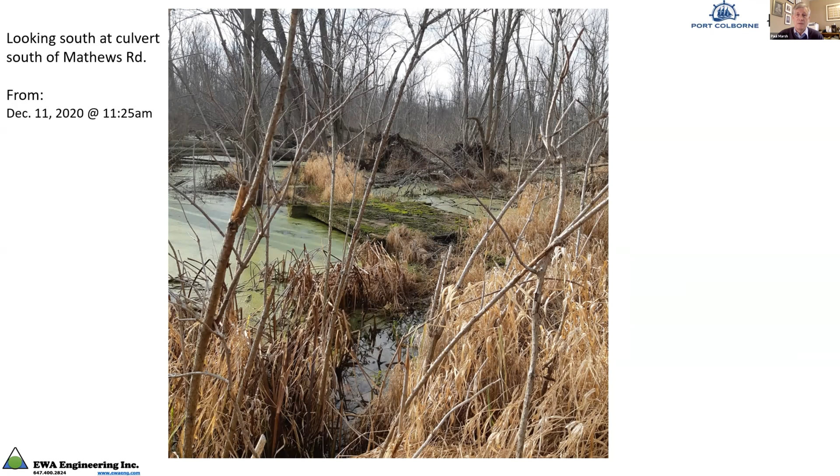My goal is to— oh, we lost the presentation there. Alana, can you bring the presentation back up?

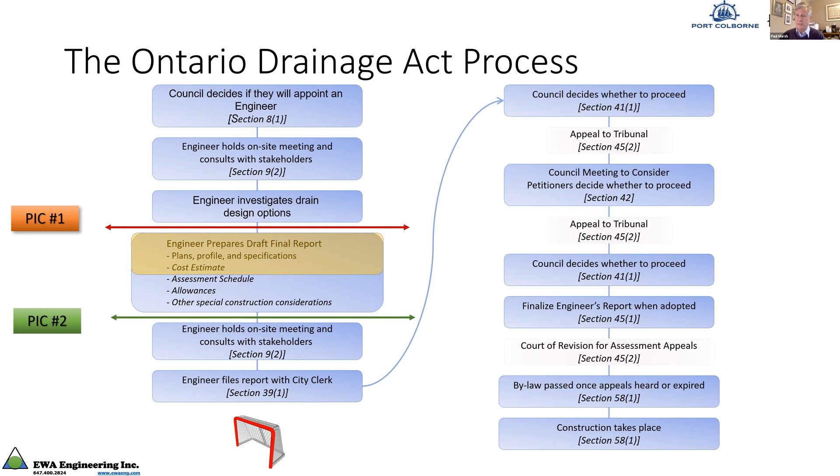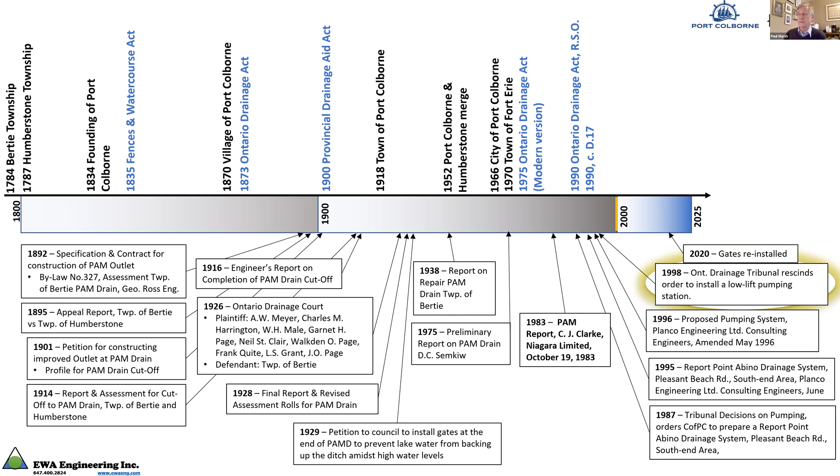In 1998, an Ontario Drainage Tribunal rescinded their original order requiring the installation of a low lift pumping station. There was an entire process, which I'll detail a bit more, in '96 and '95 to identify pumping stations, and there was a drainage tribunal over that. The cost of it was set aside and nothing was ever built.

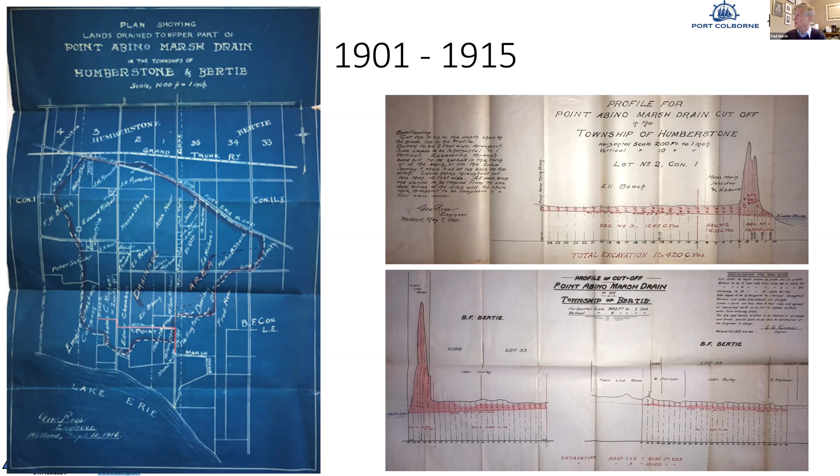These are some drawings from 1925, but to my knowledge this is not what was built. The channel doesn't follow this path.

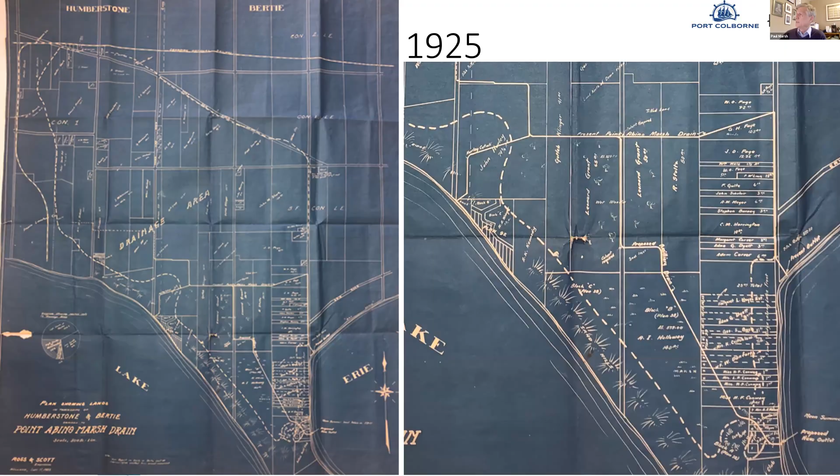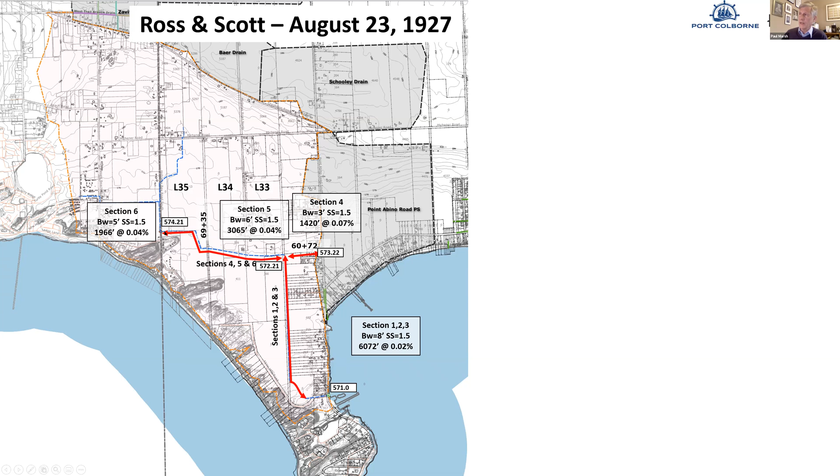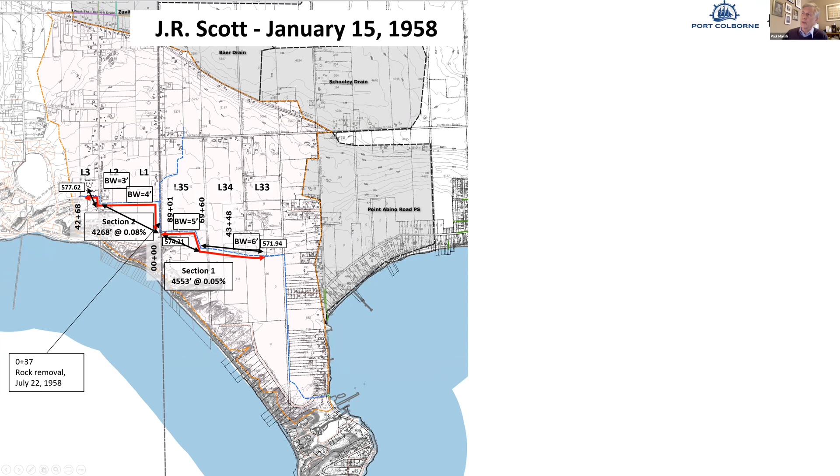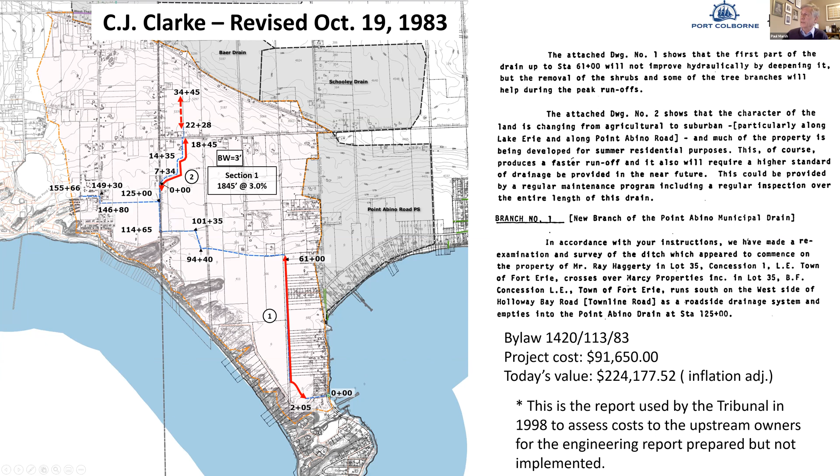This is in the CJ Clarke report in '83. There's a layout for a pump station, and I'll get a little bit more on that later in the report.

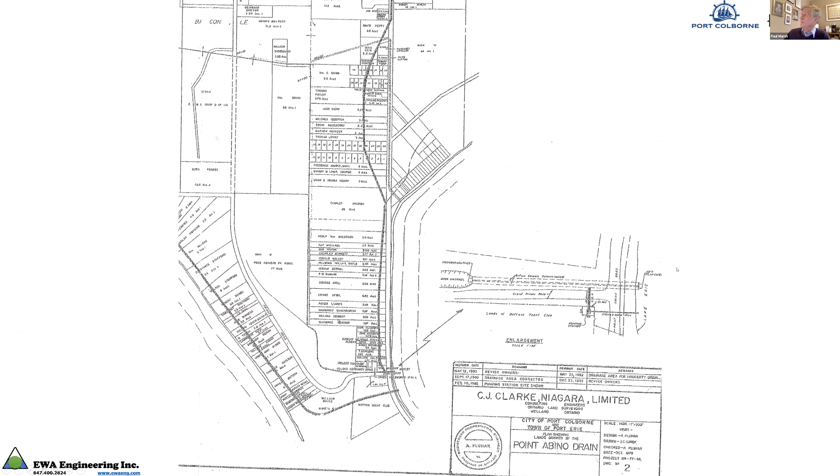This is the 1995 report that was prepared by Planco Engineers, and it was to locate a pump station for the west side, either on Pleasant Beach Road or Holloway Bay Road, in order to pump runoff off the drain out to the lake. The estimated cost of '95 was 155, which if we adjusted it to today's dollars, roughly $250,000, but it excluded property acquisition, legal, geotechnical, environmental requirements.

There was a tribunal over this, and it was basically that the original tribunal required that this report had to be prepared. The report was prepared, but nothing was ever constructed.

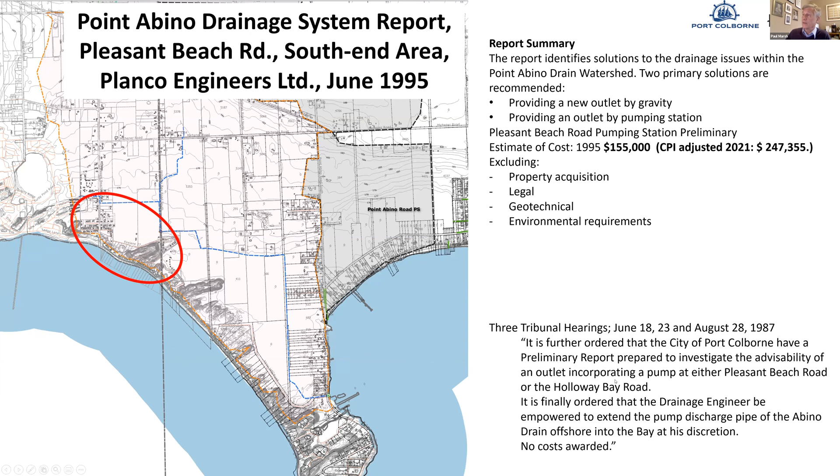This report, Planco Engineers 1996, same kind of thing, 190,000, which adjusted would be 300,000, with the following exclusions. The hearing in 1998 set aside the original order, rescinding the duty of Port Colborne to construct a pump station. This was brought about because people opposed the cost of constructing the pump station at that time. So there were plans to build a pump station, but the residents in the watershed at that time opposed it.

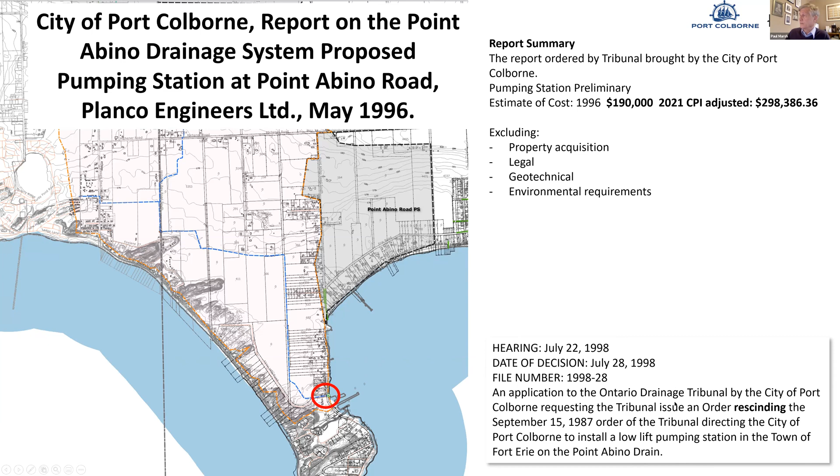Just a brief point on the eastern boundary of the drain. We made some potential revisions of the boundary based on the 1983 Clarke report, shown here with some of the historical layout of the town, where the original town line road was, and where the split between the Fort Erie part and Port Colborne part occurred.

We used the terminology going forward of Point Abino Drain. The historical terminology was the Point Abino Marsh Drain. The East Branch, shown in 1927, has no other record that we were able to find about it. As far as we can tell, it still exists as a drain—it was never abandoned, so we believe it's still part of the drain.

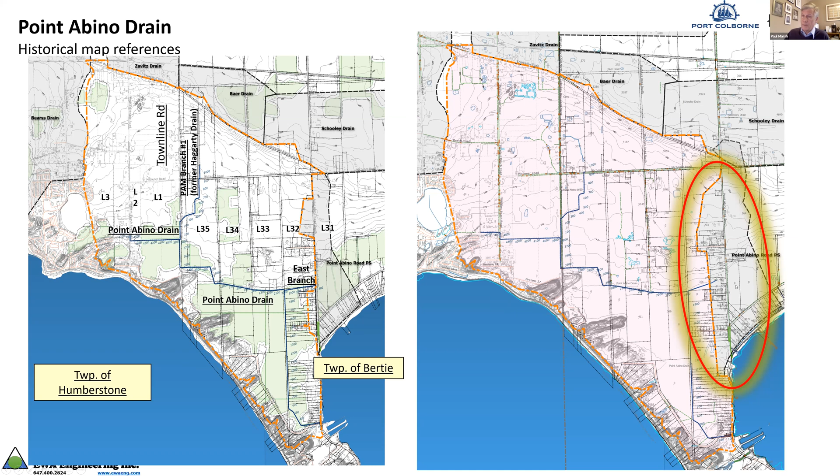The town of Fort Erie is conducting a study of the Point Abino Road pump station, located down here in the green lines. That study has provided us with a revised boundary, shown on the plans, for the lands that would drain toward the pump station versus the lands that would otherwise drain to the west into the Point Abino drain. So I want to make a distinction that anybody affected by the pump station won't be affected by the drain, and vice versa.

So I'm just going to give an overview of the baseline report. The intention of the baseline report is to state what we know about the drain and what its current issues, conditions, problems, or successes are.

This is the Point Abino drain in terms of its geography, geology, or geomorphology. There's really an entire low part of the drain, which historically we saw at 0.02% and 0.04% grade over to this point. So it's quite slow draining to the east and draining to the south and out again.

Along this western boundary are the sand dunes, which form the interface with Lake Erie. This is overlain on the Onondaga series of limestone. This upper portion is really the upper part of the watershed, and it's the part that actually has contour lines, suggesting there's fall from the upper part of the drain down to this point.

The blue line marks 176 as a contour or elevation, meaning the drain south of that is below 176 in elevation. I'd like to describe this with an analogy: this drain is kind of like a bathtub, where the lower part of the drain is the tub, and one wall of the tub, instead of being made out of steel, is made out of sand.

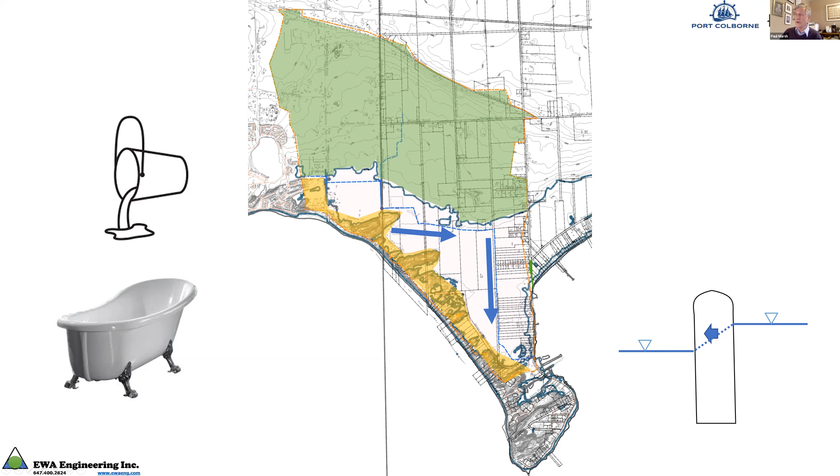As part of our study work, we've conducted a survey of the upper part of the drain. If you recall the original picture I showed, we have survey points from that, thanks to a Town of Fort Erie staff person, Troy, who waded out and picked up the inverts for that culvert. But to do a physical survey of the entire area at that time was not going to work out.

Above that, we have survey points, and these survey points allow us to prepare base plans that look like this, where this line represents the actual survey points that we found. This dashed dot line is the original design that was prepared in 1983.

It shows a 0.33% grade, on the branch one profile as an example. It's showing the left and right bank and the culverts that cross, and the blue line is standing water in the drain.

You can see there's quite a little drop here north of the Holloway Bay Road South culvert, then a bit of a high point close to the original drain grade, but it creates standing water because this acts as a hump, preventing it from getting over and out. This upper portion is fairly close to the original design grade, but actually a little bit steeper than the design indicates.

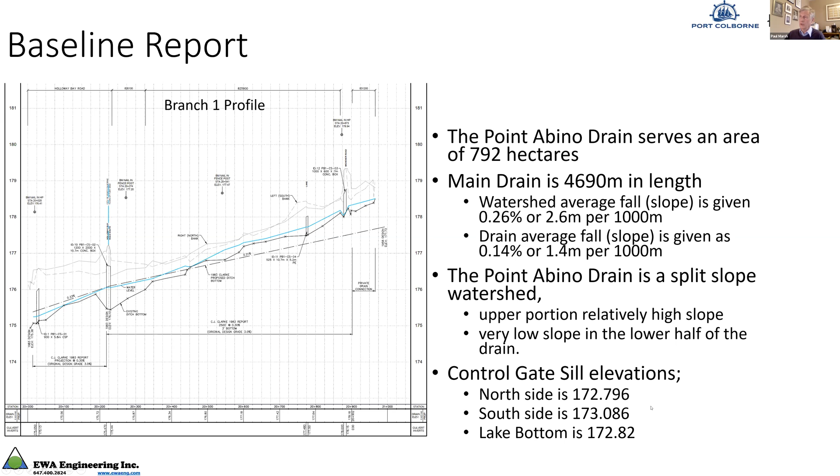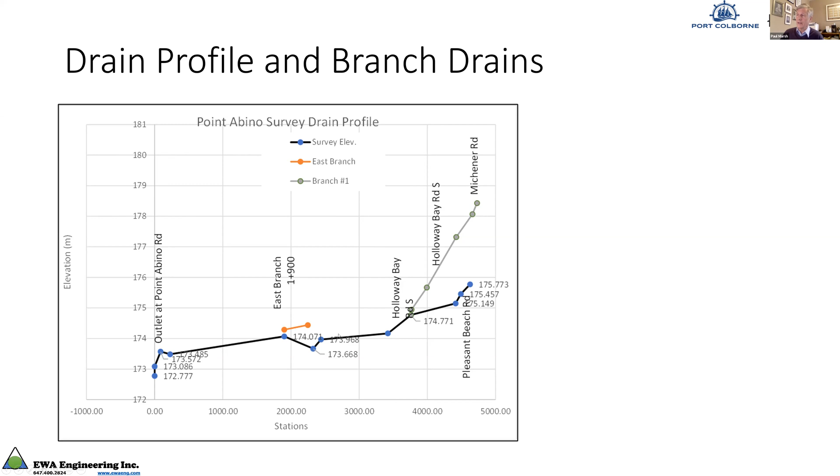What we'd prefer to see, all things being equal, is 1 meter of fall per 1,000 meters, which is 0.1%. Going over to where Holloway Bay Road is, at 3,500 meters we'd want to see about 3 meters of fall for a good drain, but there's just not a way to get that with the Point Abino drain. It's just the geology that's there. We're down at around 0.02 that entire way across.

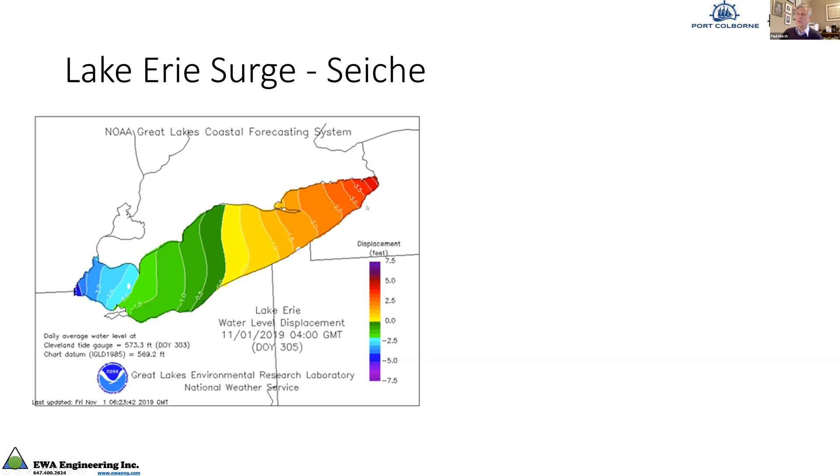The environment in which this drain exists - this is from the National Oceanic and Atmospheric Administration, showing the impact of a seiche condition where wind-driven waves cause surge. This is a high-low pressure difference from one end of Lake Erie to the other, showing around here a 3.5-foot increase, which is relatively small. We've seen this get quite a bit bigger, but it's a phenomena that happens across the west end and east end of Lake Erie. It's the reason we have flap gates on the outlet.

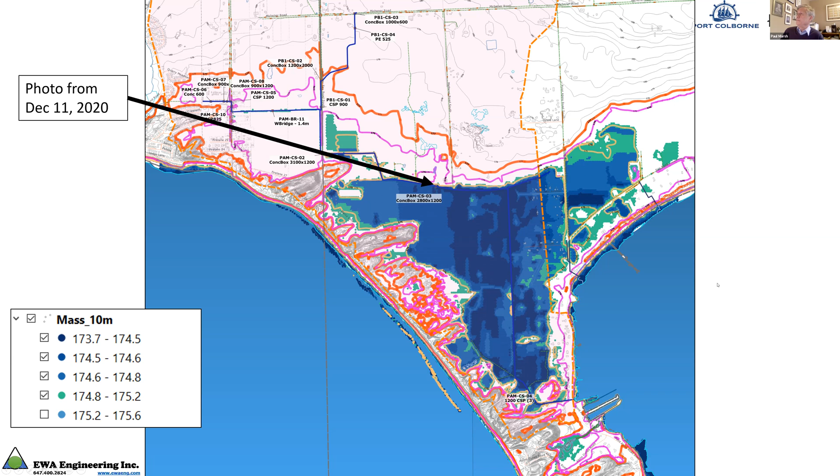You can see that this entire area would be significantly flooded by that high of a lake level. This is where that photo from the very beginning was taken, right up here. Here are our flood levels, and this is the outlet as it exists today, with the outlet down here, and these are all our survey points shown above, plus property lines for both Point Abino Road and Abino Hills Road.

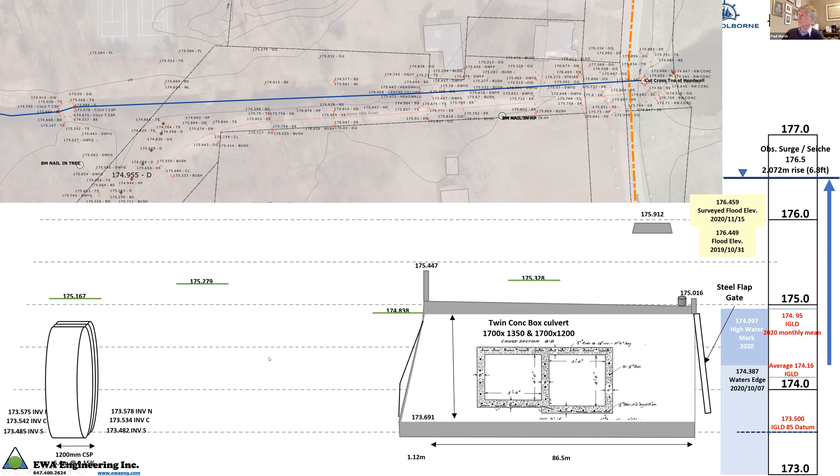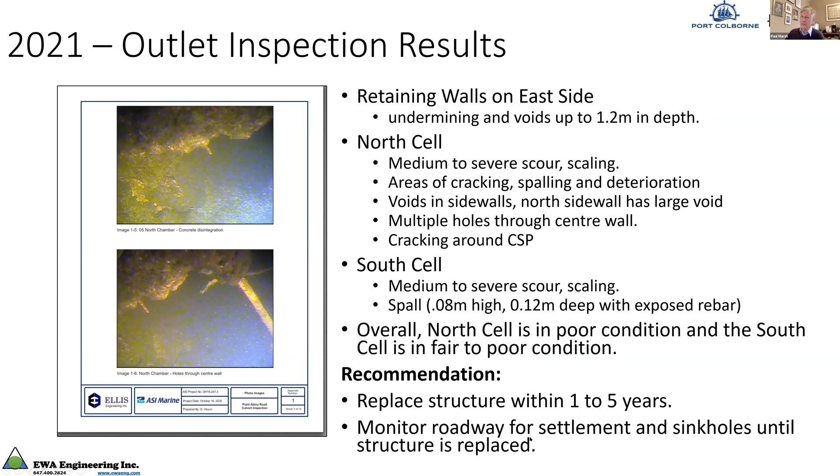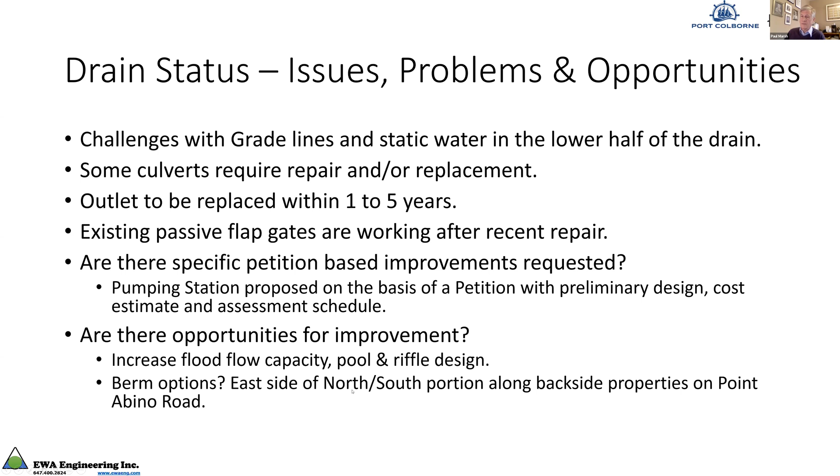I was in a meeting previously on the Point Abino Road public meeting where they talked about having some berm options along that north-south last part on the east side. But that would have to be done as part of this drain report if it's to proceed.

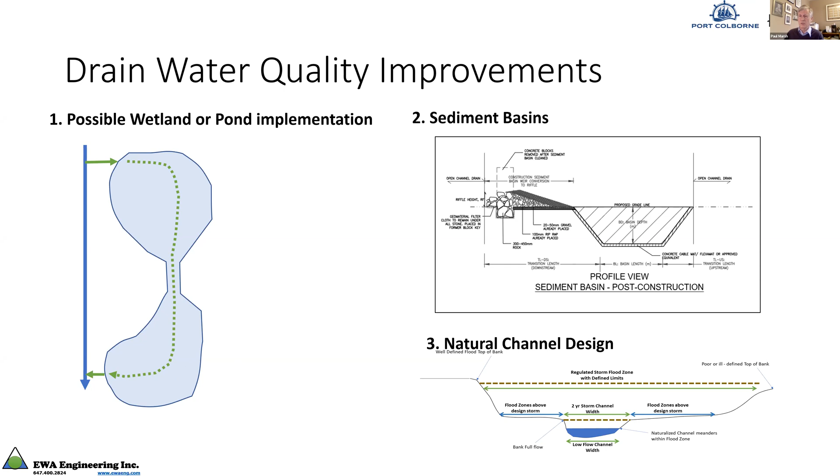The control structure has limited capacity. It's there really to control surge and control that. There are some opportunities to make that work a little bit better.

We could have flow level monitors and have active control on the gates - I'm not sure, that may or may not work better. There's no trash rack on the entrance, which oftentimes we would see to prevent material from coming in and getting plugged or stuck. And the steel flap gates have to have a certain velocity of water in order to push them open, so there's some resistance based on their weight to how much water can get out.

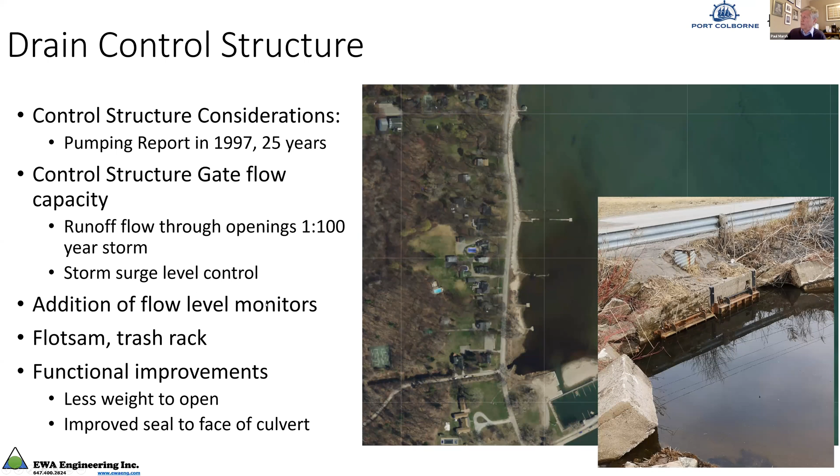Now, not all rain is converted 100% to runoff, but if we said there was a 2-inch rain, a 50 millimeter storm, and 25 millimeters of it ran off, it would take 4 days of pumping with a standard pump in order to move that much water off the watershed.

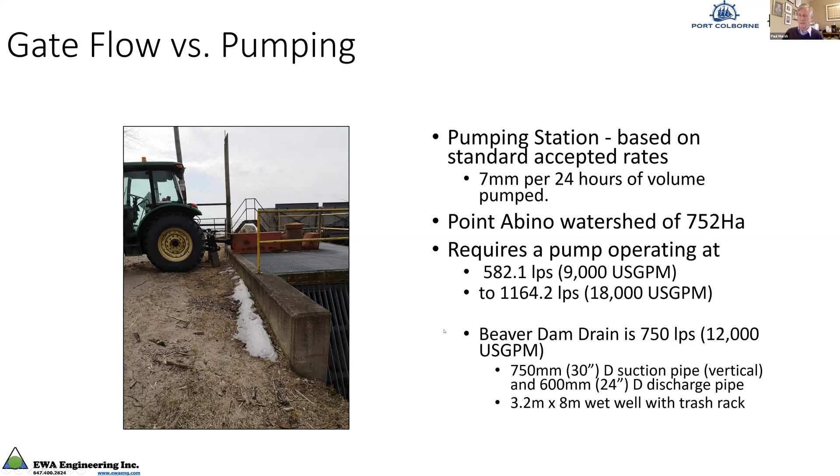This Point Abino watershed is 752 hectares. It requires a pump roughly between 600 and 1,000 liters per second, so it's just a bit under this pump. The original historical size is quite a bit smaller than that—about half that size.

This is talking about, so we've talked about the baseline, and we're talking now about our modeling of how the watershed functions and what our goals for the watershed are. We're basically testing the watershed if it meets accepted standards, and what we want to get to is a storm that is 68.9 millimeters in 24 hours.

The type of storm we use is called the Soil Conservation Service type of storm. Some storms are different intensities, and this is an accepted one for an agricultural watershed, the SCS type storm. So if we get this much water, we'd like to see the drain function to pass this much water in 24 hours. We have had more storms bigger than that.

We have had storms 63 millimeters in 1991 in 2 hours, and that would cause flooding even if we have a design that meets what we want. In '79, we had a 100-year storm, 105 millimeters in a 12-hour period. So we have had bigger storms.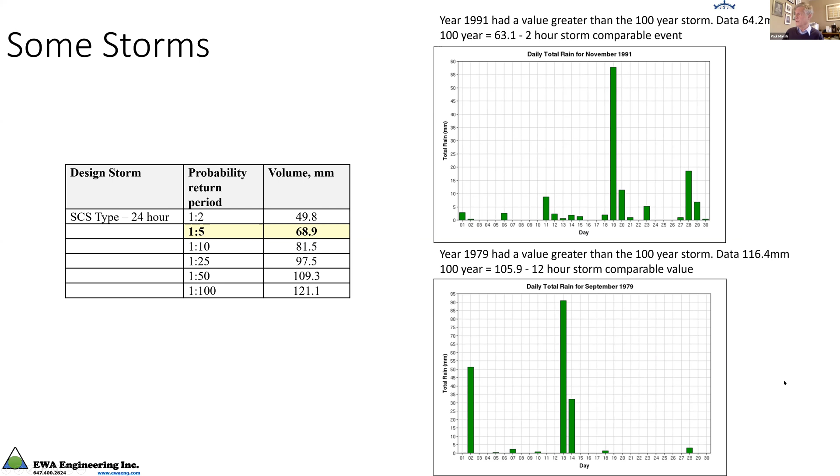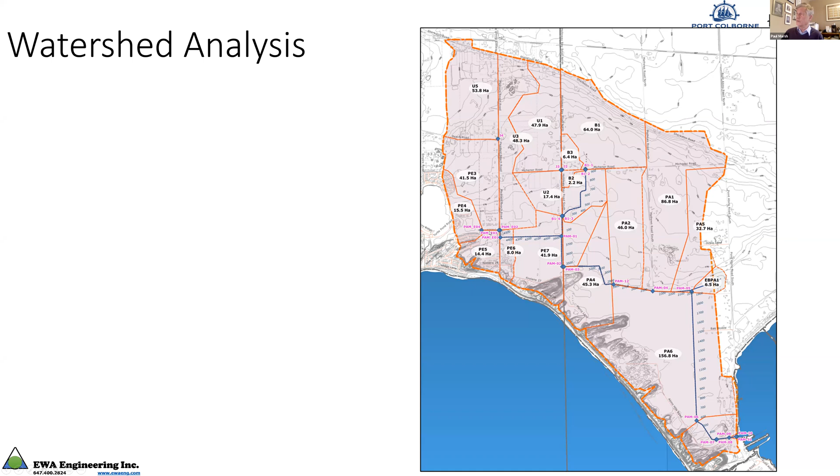This is what the watershed model looks like. We break it into these individual pieces, and we predict how much water will run off to a specific point—that's what these blue diamonds indicate. Then we figure out how much water moves from point to point all the way to the outlet. This is the kind of view that we get out of that.

You can see that half of the upper watershed—this is Holloway Bay Road right here—has quite good positive grade, and there's excess capacity for the drains to pass. Once we get to Holloway Bay Road, we have a lot of challenges in the outlet, and we have some challenges in our survey results.

So I find it hard to believe that there is this bump, but it's the data that we have this far that we have to try to clarify to understand how this drain is getting out here. But these points on average at 0.04 and 0.02 match the historical conditions.

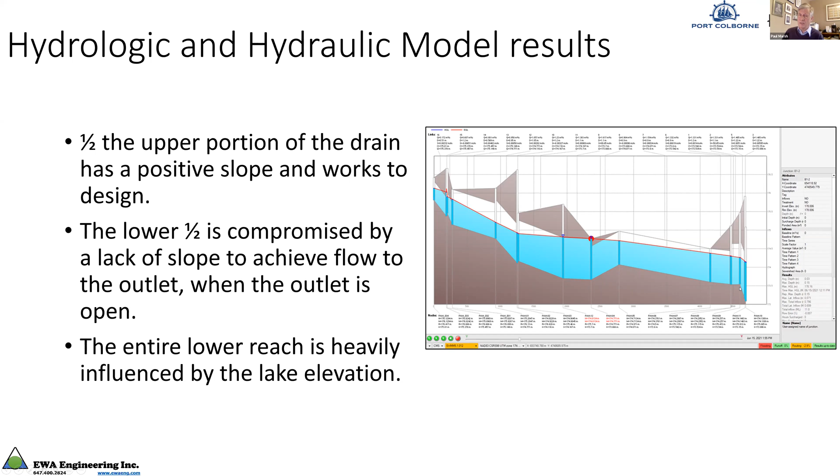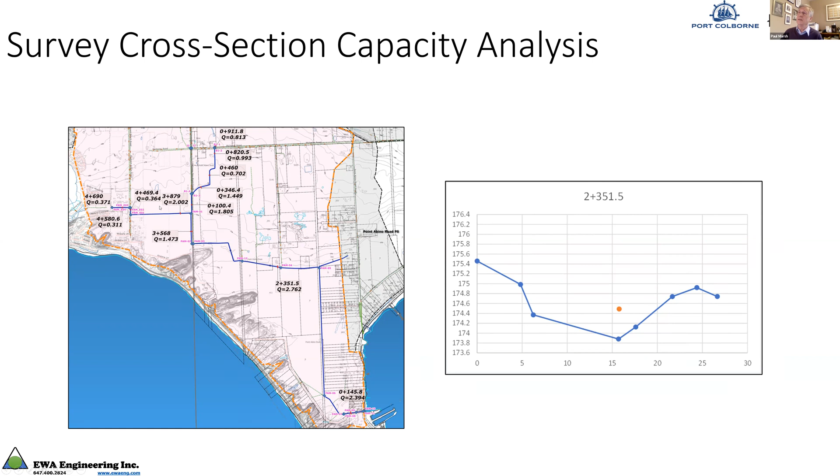Besides the computer model, the hydrology part, we look at the survey and we look at the individual sections, and we calculate how much hydraulically they can actually pass. The model really does an idealized trapezoidal channel of dimensions that we provide it, but we analyze these individual sections to calculate what their actual capacity is at that specific point. That's what this is showing here.

In addition to that, we analyze all the culverts, the same kind of thing, to see if they meet that 1 in 5 year objective. This is one of those culverts, this particular one here, and we call it marginal because it's in yellow. You can see this is the predicted upstream water surface, which is higher than the roadway, which is not desirable. For this to pass, it should be down around here.

However, this one is not a road culvert. If it's a road culvert like this culvert on Holloway Bay Road, it has to meet the 1 in 5 year standard because it's a local road. This is an entrance culvert to someone's private property, and the standards can be a little less, a 1 in 2 year instead of a 1 in 5 year. We don't like to see that because those culverts hold water back.

You can get an idea of how that is because the culvert immediately upstream is a concrete box culvert, 1.2 meters by 2 meters, and this one is a corrugated circular steel pipe that's 0.9 meters in diameter. So the equivalent area here is not a match. We've analyzed all the culverts, and these 4 are undersized, so they are something that we could fix as part of our report.

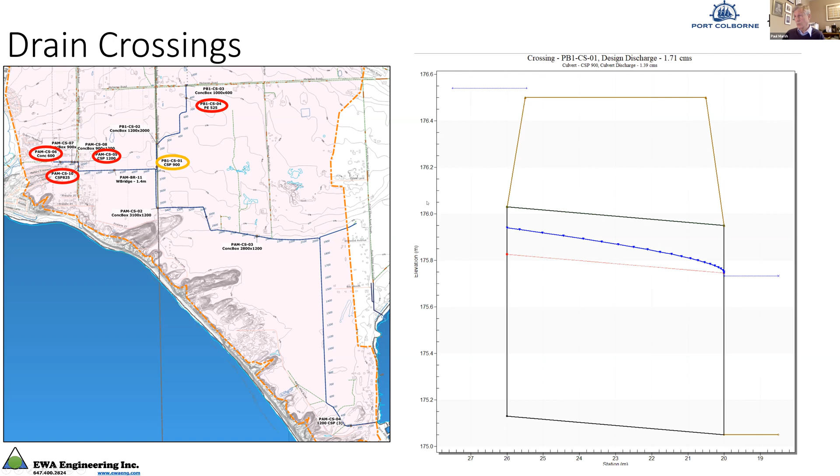Specific improvements that we think we have to address in our report. Number 1 is the East Branch.

Do we keep the East Branch, or do we abandon it? As it is right now, the proposed boundary goes through the upper part of the East Branch, and we really can't have water that crosses a boundary.

Number 2, there's not a lot to do here except show a revised grade line in metric, improving the one from 1983. It's kind of like housekeeping. There's no dramatic improvement, but we produce new plans by which Alana can seek to maintain this drain every 5 years in good condition using our updated plans.

That's the main goal for both 2 and 3, that these have available grade to work with. By restating the design targets, they can monitor their excavation to ensure it's hitting the design grade every time. They become a maintenance activity.

Now we're at number 4, the Point Abino Road culvert replacement. We can replace it and increase the capacity. Instead of 2 individual cells, we could have 1 cell, so there would be greater room to pass water. There are a lot of challenges in doing that, but it is an opportunity for us to look at ways to improve how the flow gets out, but there's no magic solution in that one.

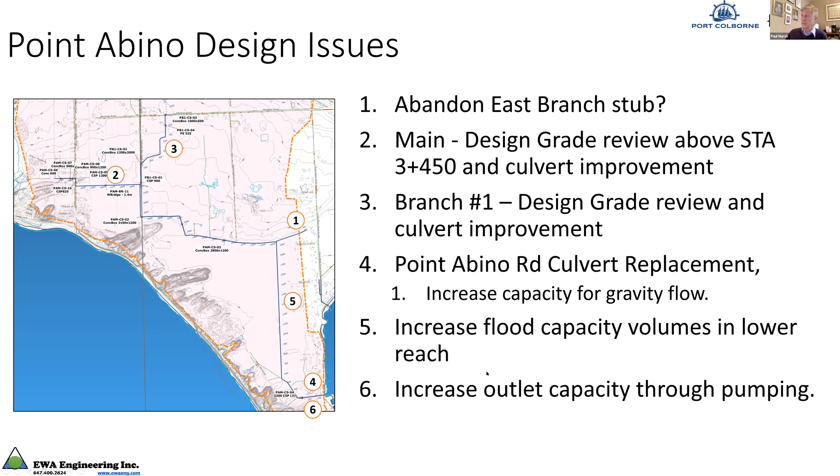Number 6 is increase the outlet capacity through pumping. I have some more discussions about number 6 and number 4.

This is the Point Abino Road culvert replacement. The total length is 86 meters, I believe, broken into 3 pieces: an outlet piece of 9 meters, the Point Abino Road crossing piece of 14.8 meters, and the portion adjacent to Abino Hills Road of 62.9 meters, which is really just providing private land access. The inspection quoted a $2 million capital replacement cost.

Now that's not a detailed cost assessment, it's a very rough, typical cost assessment. If we split that into the pieces that are the town of Fort Erie's, which is for Point Abino Road's crossing, that's 23.8 meters. It works out that they would be responsible for replacing the outlet to the tune of $550,000.

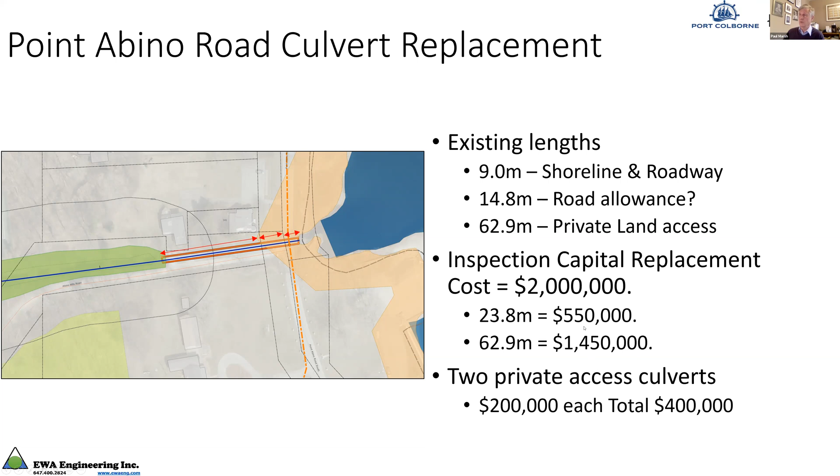The remaining portion is $1.45 million, which would be the responsibility of someone else. It's 2 private accesses, and if we rebuilt those private accesses using culverts, roughly $200,000 each for a total of $400,000. So replacing this the way it used to be is not likely to happen unless there's some way to do this without the cost we're expecting it would take to put it back the way it used to be.

If you're going to have backup power, it's typically going to be a diesel powered genset. If we were lucky, we could get a gas powered genset generator that would provide the electricity to run the motor even when the power goes out. We then need electrical equipment in order to switch it if we lose power, and then there's issues about where this would be situated.

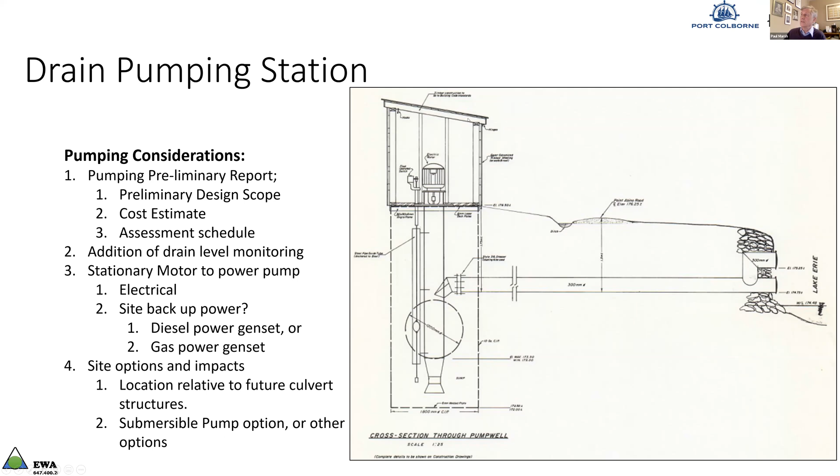And then the second one is, since this was prepared, there have been improvements in submersible pump types, which would allow us to run this without the house. Really, everything would be below grade and it would be a submersible pump. That's kind of a trade-off because the submersible pumps are a little bit more expensive, but we lose the need to maintain or build a building above.

So this is just a little bit about the pumping station in recognition of the options that we're looking at with the culvert replacement.

It would have a draw pipe that goes over to here, which in the future could be an open channel of some variety. When we're drawing from one of the cells, not the whole drain, there's a risk that we starve the pump. So all of these things have to be designed to meet the same rate of flow capacity, otherwise the pump will end up being starved. Water won't be able to fall into here by gravity fast enough to be pumped out, and the pump goes on and off more often than is desirable.

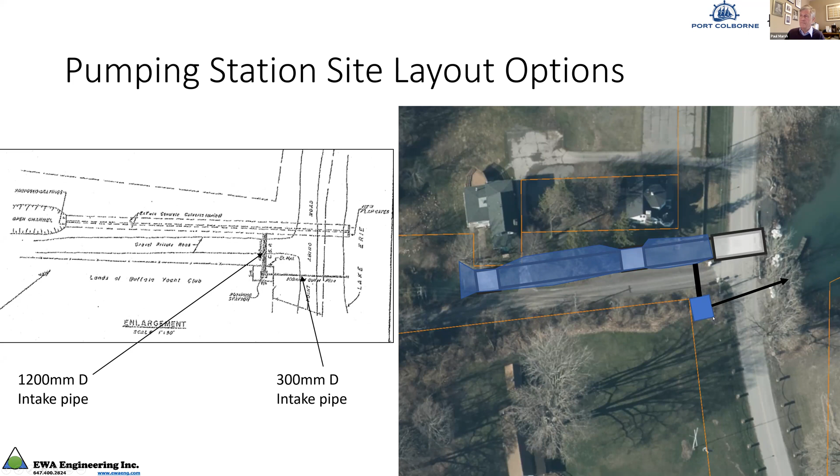So the pumping station, this is what we're expecting to do as a rough estimate. Let's just say $450,000. I don't know that that's what the cost is because we haven't done this yet, but for the sake of argument, let's say that a brand new pump station is $450,000. We have to have people pay that.

The way we propose to do that is a combination of standard Ontario Drainage Act assessment practices, which is a portion for benefit and a portion for liability from runoff. The properties that are below 176.5 meters in elevation have a direct benefit from the existence of the pump.

Now, in other places, not the Beaver Dam Drain that I showed, but the one to the west of it in Wainfleet, there were a collection of farmers and they paid 100% of the cost of the pump. And it's because they were willing to realize 100% of the direct benefit.

It could be 30% is for the people who get the direct benefit, and then the remaining 70% is paid as a property liability for outlet runoff, meaning the entire watershed pays the remaining portion of the pumps.

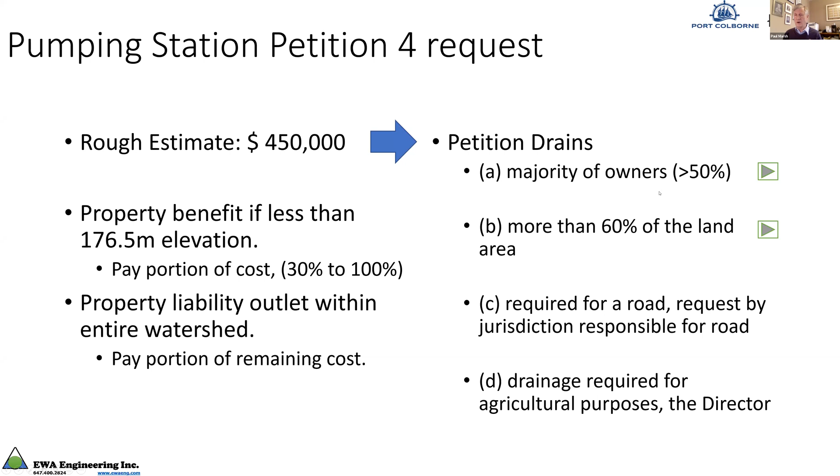So we're near the finish line, if everyone's still with me. The next steps in this are the design details and beginning the review with agencies for their comment and approval.

So one of the things noted in the original pump designs is that no environmental improvements were considered, and in fact they can represent a significant cost. We start the process by reviewing with agencies what their requirements for approval would be, and we recognize what effort it would take to actually achieve those.

And we do this by putting preliminary designs. We don't put a blank page down. We put a preliminary design down and say, here's what we're proposing. And then they tell us what studies they would have to show no negative environmental impacts.

This draft final report, and if there's any petition 4 request to resolve, we're hoping to table in the fall.

Following that, everyone gets to read that, and we have a public information center number 2, where we review all that information. Everyone gets to tell me whether they like it or don't like it. We can then make changes to the report, but that final report, recognizing everybody's input, goes to council for consideration.

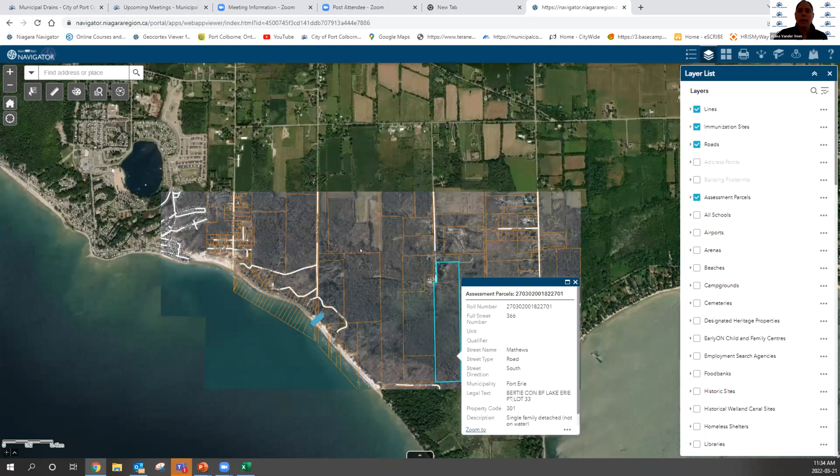There we go. So Holloway Bay Road South comes here, and that outlet was actually right in this blue area. The pipes are still there, a portion of them. What happened was when that pipe was installed, because that is the windy side, most prevailing winds come from the southeast or southwest. There's nothing that can protect this outlet here, and the beating it took within the first year made it non-functional, which was unfortunate since so many dollars were spent, and within six months that outlet was basically annihilated.

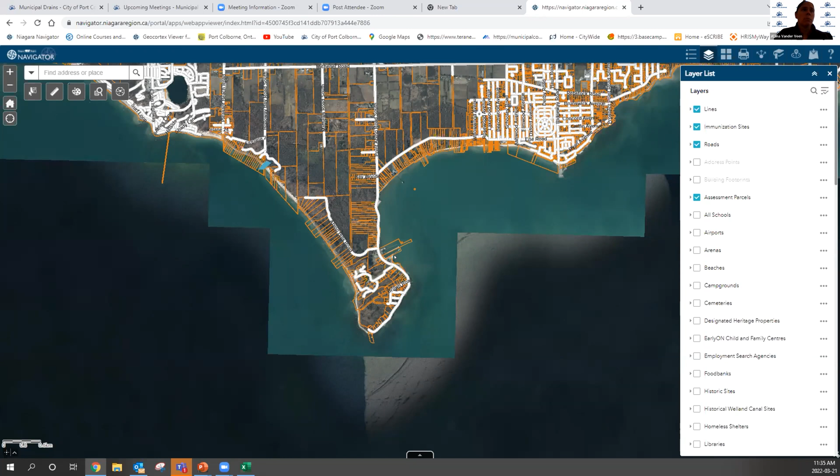We understand through the map Mr. Marsh was showing that yes, the lake level rises down in Fort Erie significantly, but it doesn't have the wind effect on the backside of the dune like it does over here. So having an outlet at Pleasant Beach or Holloway Bay Road, even Matthews Road if that were to extend all the way down, the beating it takes from the wind direction is just something we can't protect against. I shouldn't say we can't — I'm sure something could be done, but the cost would be prohibitive. So having the backside where the outlet is protected from the wind is the major benefit.

And I'm going to stop sharing. What I'll do is bring that over to Mr. DeFabio, if you have a question.

Yes, good morning. So I had a suggestion. The province of Ontario has implemented secondary dwelling units. My property is located at 557 Point Abino South, about a 3-acre parcel, and we're getting a lot of flooding this year. Concurring with everybody else, we went to cut some trees for firewood that were down, and they're just basically useless or waterlogged, can't even use them for the fireplace.

A lot of third world countries have done, even in areas where you have services like water and sewer, you install septic or cisterns. This would be a very viable option to do two things: infilling from the perspective of secondary dwelling units, which is a mandate from the province, and force these secondary dwelling units to have cisterns. I believe part of the bylaw stipulates that if you're in a residential zone, you can't have a cistern, but you would have water going into the property, which would be a secondary means to accumulate water. That would take away a lot of the surface water that's there — imagine if you had 100 houses with 100 cisterns, it would help out a lot.